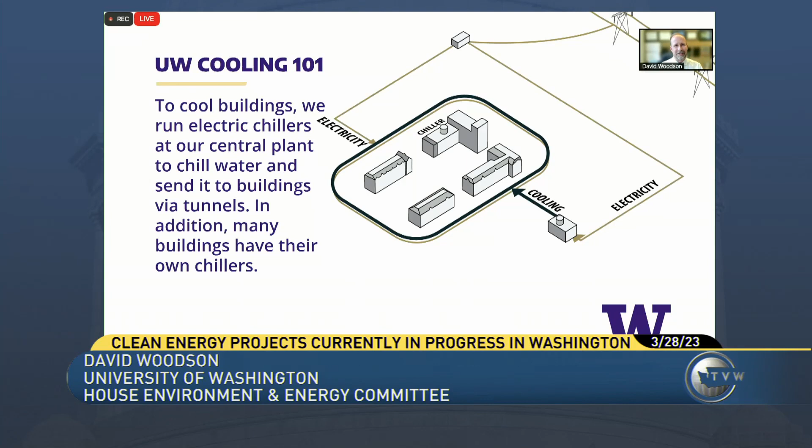For cooling, in the same central plant we take in electricity, produce cold water, distribute it to the buildings, extract the heat from the buildings, and bring it back to our central plant. But because the steam system temperature is too hot, we're not able to reuse that waste heat from the cooling system, so we just get rid of it through cooling towers and dissipate it to the air. If you walk down the Burke-Gilman Trail, you hear waterfalls flowing through spring, summer, and fall - that's us getting rid of that low-grade heat.

The challenges we face on campus are really fourfold. Number one, as I mentioned, 93% of our Scope 1 emissions come from that natural gas at the plant. So for us to no longer be a covered entity and significantly decarbonize our campus, we need to address the way we heat our 170 buildings.

Energy efficiency: we have quite a variety of buildings on campus. The hospital is connected to the system, we have research facilities connected to it. But there's a huge opportunity to be more efficient with the energy, including the electricity we consume, and you'll hear that in the 5-part strategy.

It's great that we're connected to Seattle City Light and have clean energy, but we're constrained. We're right at the N+1 capacity from them. So the fundamental piece for us is we need to be really smart about the electricity we use, especially as we're doing this fuel switch for decarbonization.

There's also further pressure on electrical use because of climate adaptation. We live in the mild Pacific Northwest that's not as mild as it used to be, and we have buildings without cooling that now need it today, typically from mechanical cooling, meaning more electricity to produce cold water. Fourth is all the infrastructure in our steam plant - it's aging and we'll need significant investments to replace it, so why not invest in a way that addresses the first three problems on the list?

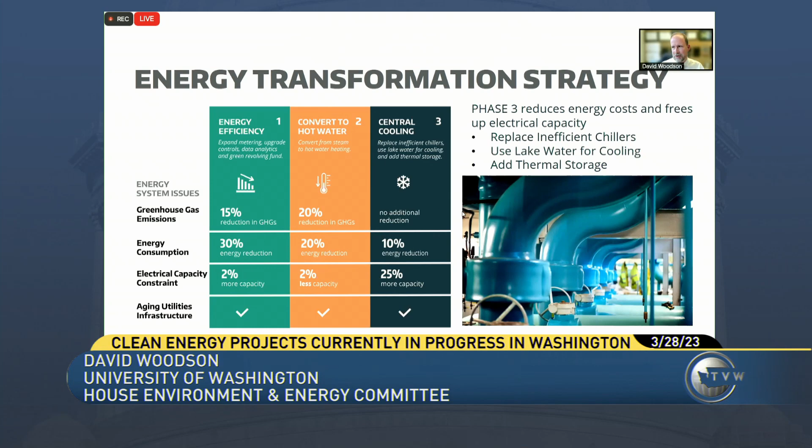The other advantage is all that waste heat that comes back from the cooling system is now available for us to use in that new hot water system to displace natural gas to heat the campus. Now, the only downside of using waste heat from the cooling system is there's an incongruency of when you use it versus when we need the heat - the least amount of cooling happens in winter and the most happens in summer.

So it's great for the shoulder seasons, but we need to look for other sources of low-grade heat for the summer and winter. One that stands out is the regional King County sewer lines that run adjacent to both plants. They really couldn't be any closer than they are, so that's a fundamental opportunity.

And the third being the lake, which is really just a form of geothermal, but we know exactly the distance we need to go in order to access that same temperature water all year round.

What's interesting about the lake opportunity is it also has, in its early stages, the opportunity for environmental betterment, in that we could take cold water from the deep part of the lake, use it for cooling on the campus in the summertime, and return colder water into the ship canal, lowering the temperature and improving conditions for migrating salmon.

In the wintertime it would be even better, in that we can take cold water from the deep part of the lake, extract heat, return even colder water to the ship canal, and create almost a pre-seasonal cooling of the ship canal. Long way to go, some 19 permits that we need to apply for and go through. So a long process, but a project with the potential of addressing climate adaptation through increased cooling in the summertime, decarbonization by displacing natural gas in the wintertime, and improving a migratory corridor for salmon through the ship canal.

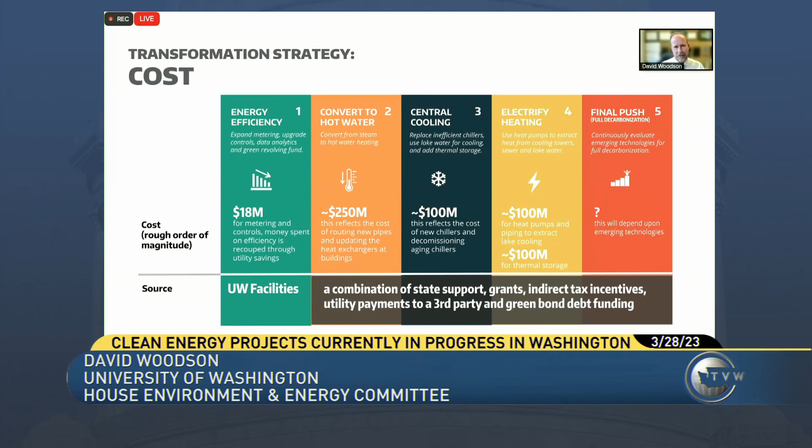We're still trying to get clarity on our status as an instrumentality of the state and our ability to qualify for direct pay under the IRA. So next steps: continuing our efforts that we've already started on accelerating energy efficiency and retaining a service partner to help implement our energy transformation strategy and provide progressive design coordination across all of those projects.

Thank you. I think I'm right at 10 minutes, I hope.

That was great. Thanks, David. Any questions?

Rep Ramel: Thank you, Madam Chair, and thanks for the presentation, David. I don't think we've talked much in this committee, and I don't know if we actually have any sewage heat recovery projects in Washington. At first glance that sounds like it could be pretty gross. Can you talk a little bit about how that works and reassure us that it's not?

Yeah, so what you're really after is the heat from the water. Think of all the people taking showers early in the morning and all that wasted hot water that goes down the drain. That's the heat that we're trying to capture out of the sewer.

And there are some pretty successful projects to look to. The city of Denver has one. They use a company called SHARC, which I think is based out of Vancouver but is also in the state of Washington. The city of Vancouver had a sewer heat recovery system from the 2010 Olympics, which they've recently expanded. This technology has changed quite significantly in its ability to keep the solids in the fluid stream from contaminating the heat exchange process.

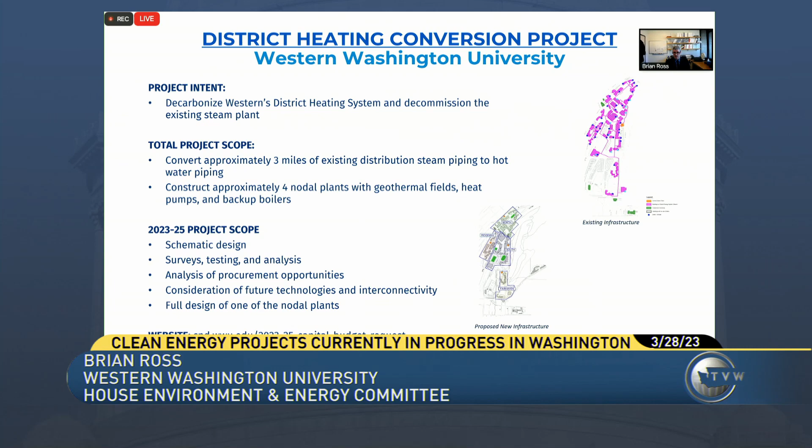We'll also be having one of the node plants designed. Our big goal is in calendar year 2027 to be able to operate the first node. Going all the way to 2033, we're hoping to have all 4 nodes operated, and by then have the existing steam plant decommissioned. So this is our program at this point in time -- we're looking forward to the current studies and program once funding is hopefully solidified.

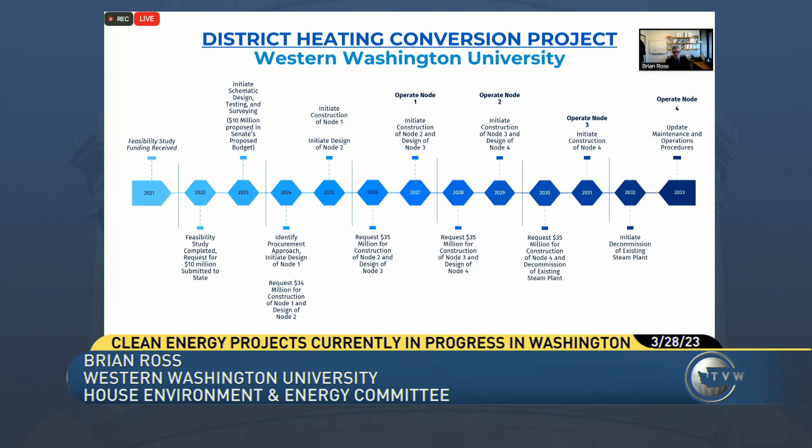From there, I'm going to punt this over to Mike Hogan, and he's going to talk about what they're doing down at the port.

Thank you, members of the committee. Really appreciate the opportunity to talk about the Port's district energy system for Bellingham's downtown waterfront. This has been a project that's been a long time coming, starting back...

...after the port acquired the Georgia Pacific pulp and paper plant back in January 2005, beginning the transition of that heavy industrial property into a mixed-use development. Folks really realized that the opportunity to connect downtown Bellingham to the water and plan a neighborhood of the future was a once-in-a-lifetime opportunity.

The port was working with the city. It's about 237 acres on the downtown waterfront. There were many things that went into the planning, but one thing that jumped out early was the opportunity for a district energy system.

There's an Encogen, a Puget Sound Energy cogen plant that historically had supplied hot water and steam to the Georgia Pacific plant. Once that operation was disconnected, it was looked at as low-hanging fruit: how could we capture that waste heat from the cogen plant and use it to power new buildings on the downtown waterfront.

A big thank you to folks in our community who lobbied for that type of system rather than business as usual. Sustainable Connections was a great local organization that organized tours for port and city leaders to Dockside Green in Victoria, and up to Vancouver to see the systems at UBC and Simon Fraser and False Creek. That resonated with leaders.

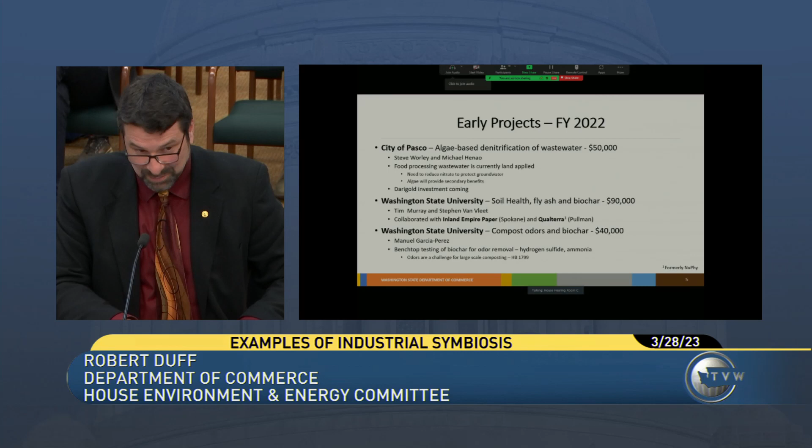Which then removes that stunting of the growth and gives you bigger yields. And finally, in our first year, we provided a grant to Manuel Garcia Perez to take biochar and see if it can stick hydrogen sulfide, mercaptans, and ammonia, because as we get ready for House Bill 1799, we're going to do a lot more composting, and there's nothing that will put the brakes on composting like odor complaints by people that live nearby, and I think we all could probably understand that.

You're going to hear from Qualterra. They were also one of our recipients, so I won't dwell on what they're talking about, but they've got some really impressive results with both apples, hops, and wheat.

Minocarbon, you will also hear from today. They have an interesting project co-located up at Kettle Falls at the biomass to energy plant. So they already have the slash coming in - that's important, they're not going to have to bring in through trucks a different transportation system. So they're going to make biochar out of some of that slash.

And then also an R&D project that they're working with PNNL is - can we find a new liming agent? Lime is really expensive, and we're sort of falling behind in trying to deacidify our soils. So if you actually capture the waste CO2 as you're capturing the energy, scrub the basalt, it's possible that we can create a liming agent that can also help farmers.

And then finally, Impact Bioenergy is going to take their anaerobic digester. They're installing pipes that will get a nearby farm off of natural gas and onto their RNG, and they will capture that waste heat, bring it back, dry the digestate, and use that as fertilizer.

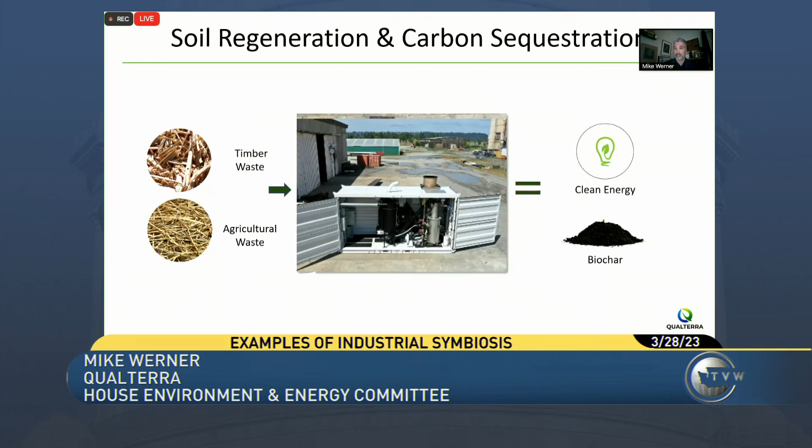The most important thing is to really eliminate that waste, because when you think about what's happening in our environment, if that waste doesn't go away, it's either going to decay and become carbon in the atmosphere, or potentially it's going to be burned and become carbon in our atmosphere.

What our technology really does, especially in the forestry and agricultural industry, is allow people to use our technology to eliminate that waste, put that biochar through carbon sequestration into the ground, as well as grab that renewable energy to heat facilities locally.

The heat from this facility costs about 3 to 5 kilowatts of power to really run the machine, but it produces 80 to 100 kilowatts of power based on the biomass. Woodier biomasses produce a little more energy, a little hotter, whereas wheat straw and other agricultural biomasses tend to be a little lower in the energy profile, but still very efficient.

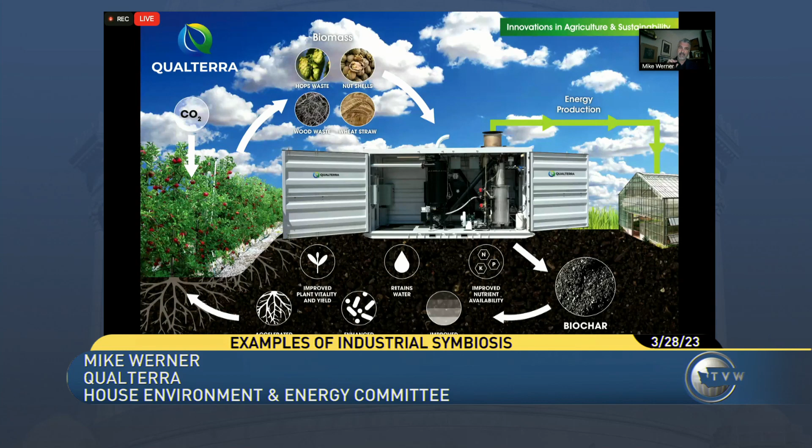But that biochar that we produce, especially that agricultural-based biochar, seems to have a lot of exciting properties to it.

This slide here really references what our biomass processing units can do. They're the size of a cargo container, very portable, very mobile. They can process about 450 tons of biomass each per year, creating about 112 tons of biochar. When you grab the energy from the units and grab that biochar and sequester it in the soils, the CO2 offset for a system like this is about 600 tons per year.

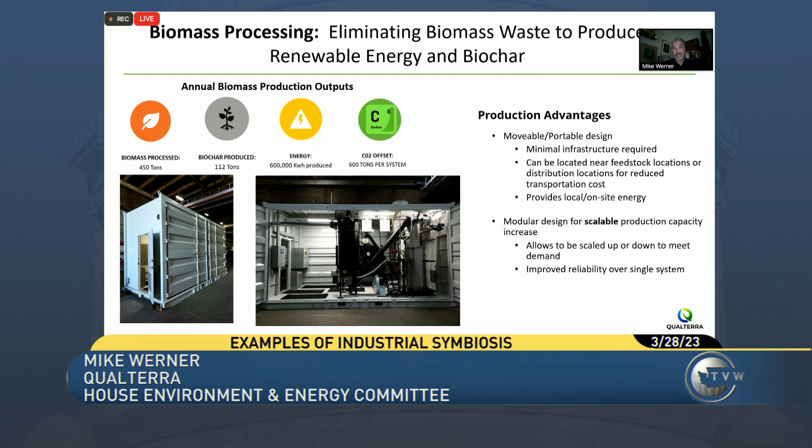One of the things about the technology that's important, and that we've done a lot of research on, is what is our footprint to build one of these units? Just because we can build a technology that has the ability to address climate, what is the downside of producing that? And how do you pay that carbon burden off?

So what we've done is a study on how that looks. We've gotten some third-party feedback on that as well. After running one of our biomass processing units for 1.36 months, you pay off that carbon burden and are carbon negative from then on when you produce biochar and renewable energy with our units.

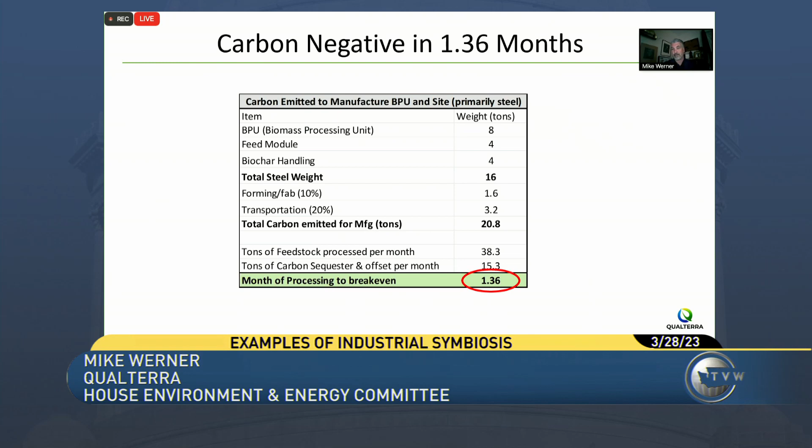So coming back to that biochar, crop residue, like for example wheat straw—these are studies across rooting and fruiting and leafy green vegetables that showed 50, 60, 80% increases in yields across a variety of different crops.

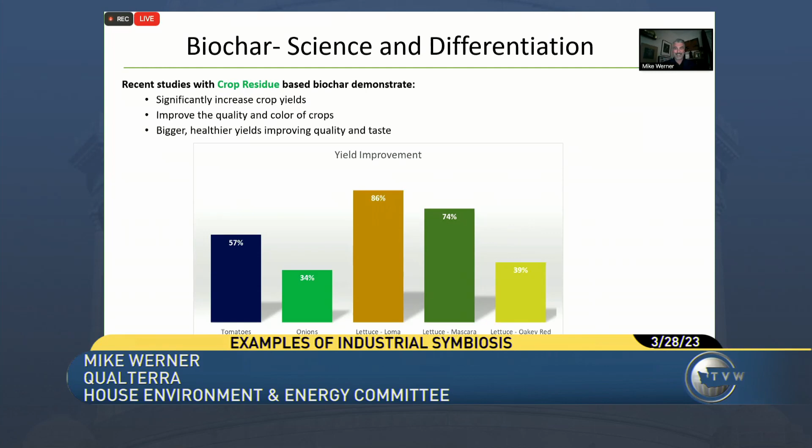And so it's easy to look at a bar chart and say, okay, what does that look like? But what does it look like in the field? So this is the tomato study. It was done at Schreiber Farms here in Washington State, a third-party research farm.

These are tomatoes side by side. The ones on the left were untreated. The ones on the right were treated with our biochar. What's important to note is that at about 130 days, the plants on the right are ready to fruit. The plants on the left are not.

So if you get to a higher, faster vegetative state, all of that extra energy can be driven towards fruiting—so higher quality yields, higher quality fruits. And we did some additional studies that showed the sweetness, the brix in those tomatoes, was vastly improved using biochar as well.

But the important thing is that there was about a 20% increase in canopy in about 5 months after planting. So it's important to know, what does that mean, a 20% increase in canopy? We asked our customer that question, and he said that means I'll harvest those plants potentially 1 year earlier than the rest of the orchard.

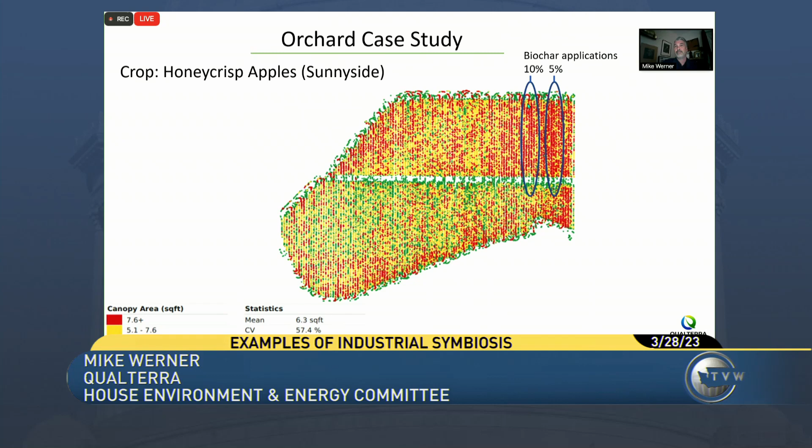It was something we noted in our research. We're affiliated with Washington State University. Our Chief Science Officer, Dr. Amit Dhingra, is head of horticulture sciences at Texas A&M University, as well as an adjunct professor at Washington State University. He agreed that most likely these trees would be harvested about a year earlier.

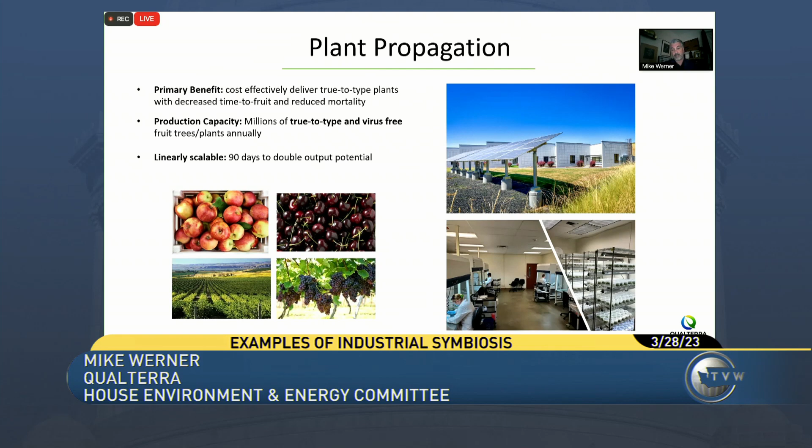Thank you, fascinating presentation. Can you tell me how much each unit costs? Each biomass processing unit costs about $425,000. There are additional integration costs, and it depends on how different people want to use them, whether they want to capture the renewable energy or just get rid of biomass. If capturing renewable energy, that's probably another $50,000 to integrate, but about $425,000 for the unit. The units are built here in Spokane, Washington, using a contract manufacturing organization called Highwood Global. Hopefully that answers your question.

Thank you, one more question. Does the quality of the biochar change with what you use to produce it? No, that's a great question, and an important one. Our technology is about 10 years old, we've been building this technology for quite a while. Because of the software built into our system through that automated process, we can produce the same type of biochar, the same quality, and the same characteristics of biochar based on the biomass almost consistently every time.